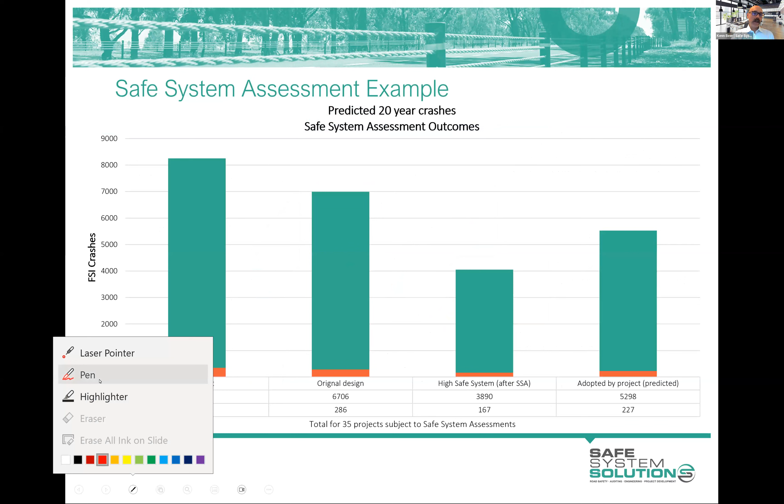Okay, I want to talk to some of the benefits of a safe system assessment. This graph is the output of an independent evaluation of 35 safe system assessments that were undertaken on really big projects. So we're talking town bypasses, new motorway interchanges, really big type projects. Now, this was done using a crash prediction model and technique. Basically, for those who know ANRAM, it was ANRAM plus a little bit more. This was led by Blair Turner, for those who know Blair.

It took all of these safe system assessments, looked at the projects, looked at what they were planning originally, what the safe system assessment said, what they ended up building, and used a prediction over 20 years as to how many crashes would have occurred, how many were saved. So let me talk this through, because this particular graph tells quite a story. This is fatal and serious injuries. Some of you might use KSI, killed and seriously injured, but FSI is what a lot of jurisdictions use. And it starts here with no project.

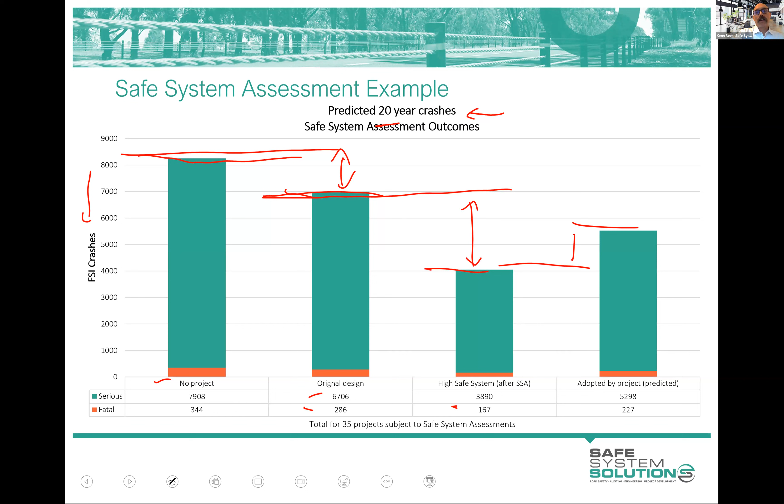the story it tells here of interest for me is that, first of all, we see benefits. We see benefits there from the original design, just what they're producing. It's going to improve safety. That's sort of what more we could do in a theoretical sense. That's an interesting one as to why we go back there. But the difference here, that's the current and immediate value of safe system assessments.

Just by going through the process you're going through, making the recommendations and them altering it within their abilities to do that. So this one for me is quite interesting in the sense that why are we as safe system assessors saying things and they're not adopted? And there's many reasons for that. It can be things around cost, perceived community acceptance, uncertainty around the treatment suggested, maybe just a cultural thing of not wanting to do that sort of stuff. So there's lots of reasons, and I think we can continue to work on that. I think that's just a huge tick, and that's why a lot of jurisdictions are mandating safe system assessments.

But this is another one I find interesting. Why are we still seeing all of those deaths and serious injuries all over these areas over the next 20 years, even though we've done a safe system assessment, even in the best safe system assessment outcomes? And that's what we'd call the residual. And it's something we need to work on. But these are things that we don't really have good answers to.

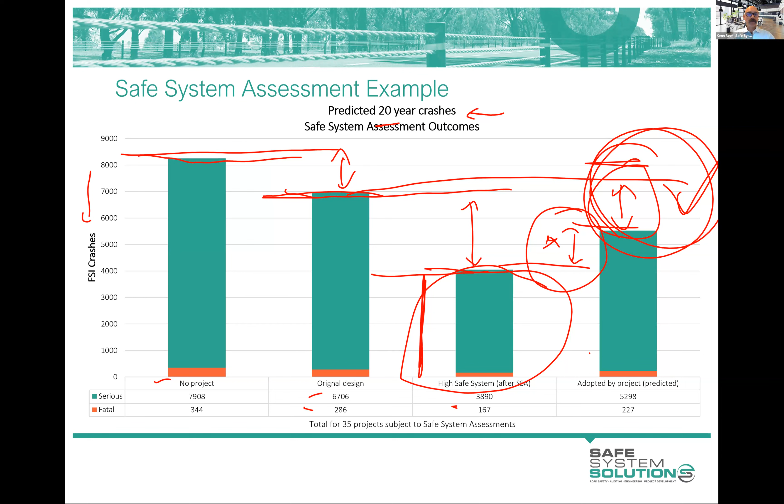And in terms of other benefits, a few dot points here, which you can have in your back pocket if you're trying to talk to people about why they should consider doing a safe system assessment. Really good way of determining how well a project aligns with safe system principles, which sounds obvious, but a lot of the time it's just been an area for debate and people arguing with each other about safe system alignment and not. So it at least provides a methodology.

Great for comparing project design options or choices around intersection form or project alignments and these sort of things from a safe system perspective. And we haven't really had that. Any of you who are road safety auditors, you remember that we say a road safety auditor's job is not to rank your projects from best to worst for safety. They just simply look at the risks of the project that's put in front of them. Whereas a safe system assessment provides that nice way to actually compare. So if you're doing a multi-criteria assessment or something, it feeds in just beautifully in terms of that weighting of different design options.

Information on design changes that will move a project closer to safe system objectives. And it is closer. You saw that just doing a safe system assessment isn't going to get us to zero. There's a whole lot of other stuff, but it's moving us along significantly there. It's a good method for assisting planners, designers, project managers to move the safe system from theory to practice.

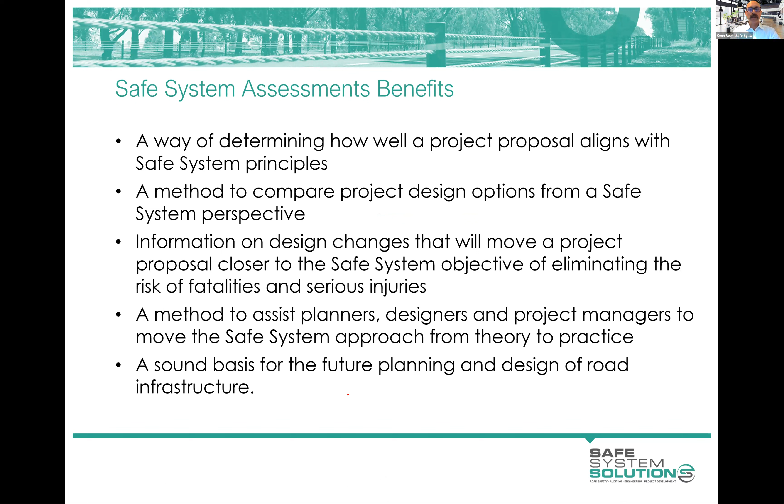Okay, so keep your questions and comments coming in, but I'm going to take you through the general safe system assessment process. So a project, they're planning, they're thinking about doing upgrades to a road or an intersection or a motorway or a massive length of road. And where along the line is a safe system assessment good and where's a road safety audit good? And we always talk about doing safe system assessments early in a project. I think you're getting the feel that a safe system assessment is challenging a lot of the fundamentals of projects, the intersection form, the cross-section, the addition of separated shared path facilities. It's pretty big stuff. And if the business case is approved and the designs are all done and they're into the details, they're not going to change any of that.

So we want to be in there using this methodology to try to influence the form if we need to get better safe system outcomes. Then road safety audits just seem to have a process that sits better with those details. Partly I give examples of, like, maybe a road safety barrier's flare rate or something like that.

Okay, the flare rate of the end, like, in a safe system it is not going to change your scoring. It's not like that; safe system assessments are bigger, meatier things than that. But that's important stuff, and we should, at the details, be looking and investigating into that. And a road safety audit does that sort of stuff really, really well. That methodology just lends itself to that.

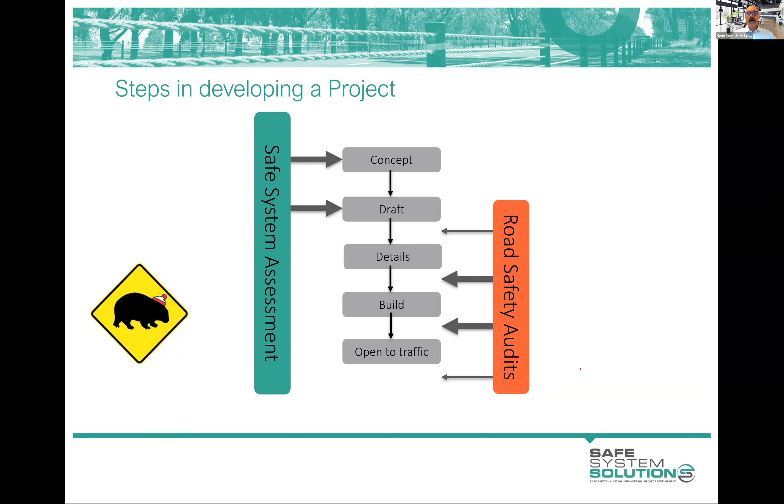Yeah, so there's a little bit of a general diagram you could have a think about. But those differences between the road safety audit and the safe system assessment, as I mentioned, they're coming closer together. They both look at the likelihood of crashes really well. The severity of crashes, road safety audits should look at quite well, but I'd just say that industry practice and some lagging processes and ways that people operate mean that sometimes you're absolutely forced to do that in a safe system assessment, and it's really handy to have that.

I still see this quite a lot, like a new large signalized intersection, and there's a road safety audit undertaken on it. And the issues that come back are talking about sight lines for the signals, back of queue issues, line marking alterations, and these sorts of things. Very important stuff associated with trying to stop people crashing.

There is just nothing in the report associated with what happens when somebody runs the red light, and they're going to do it fast. And so they're not thinking about the severity of crashes, because in their mind they're all about eliminating, or trying to eliminate, the possibility of a crash happening. And that's fantastic. We want to do that. We want to do as much as we possibly can there, but we have to get in that mindset that crashes will still happen. How bad are they going to be?

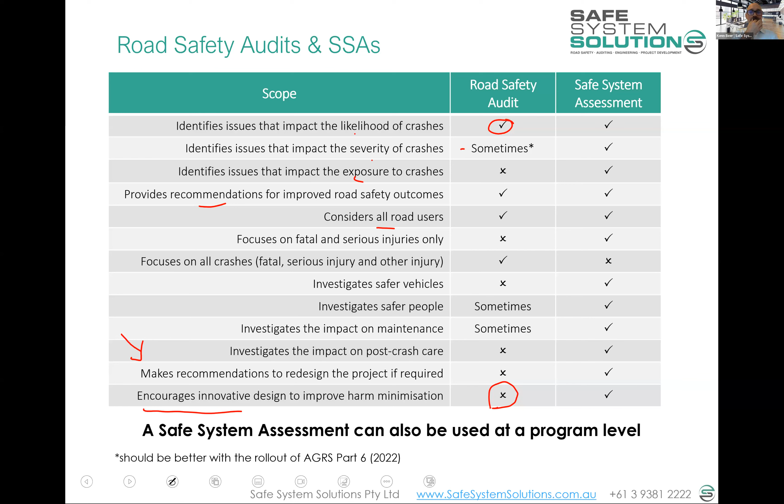So the process we do is that the client or somebody who's commissioning the safe system assessment decides: are they going to do a full-blown safe system assessment, or are they going to do what we call a rapid or light safe system assessment? I will, in a slide or two, show you the difference between those. It's not like one takes two weeks and the other is done in an hour. No, they're fairly similar. The rapid maybe takes about 30% of the effort off, so it's still about 70% of the effort.

Is my screen black? I can see the title. Yeah, no. It's okay. I think everyone's all good. So maybe Anthony, if you could log out and log back in, please. Yep, perfect. Thanks, Ken. All good.

Good, thank you. So I'll talk to you about full and rapid, but then a safe system assessment team's chosen. Now, the only jurisdictions to have any sort of registers of safe system assessors are Victoria and South Australia. Everyone else is just accepting a certificate of successful completion of a safe system assessment course, which you're well on your way to getting. But I'll even show you the Victorian one as well in case you want to jump onto that.

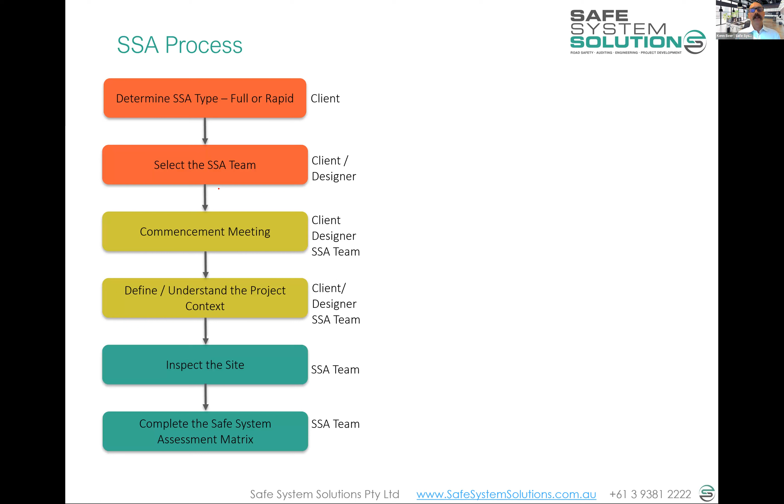And then the assessment team's got all the information that they need, and then they'll go out, they'll look at the site, try and understand the existing conditions, and then fill out the safe system assessment matrix, consider those other elements of the safe system through those qualitative questions that we took you through, come up with some suggestions for changes that would improve alignment with safe system principles, write that up into a safe system assessment report. And we're lucky now we have the templates that we can use, so we're all consistent across industry in what we're producing.

And then that's handed over to the client, and their responsibility then is to look at all these recommendations, the scoring and everything like that, and make decisions on what they can change, what they can implement, what they can adjust in their project. And they do that. They amend the project, the design, to incorporate what they can. Now, if that's not going to happen, then what's the point of us going through all of this big exercise?

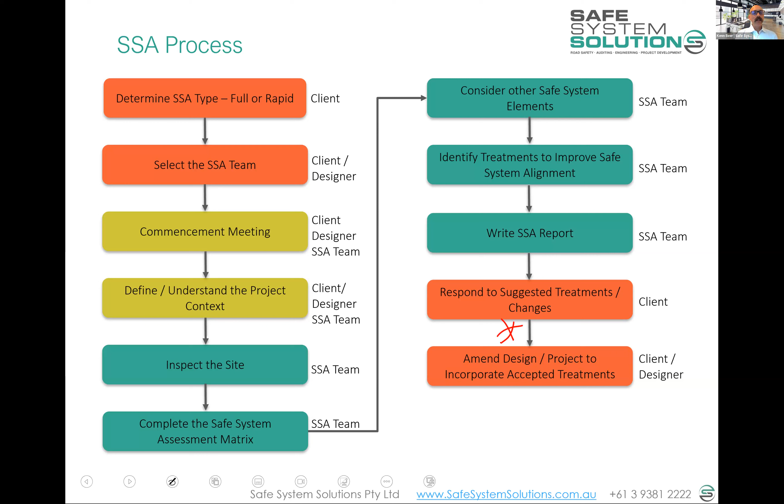Now, sometimes at this point, a project team, they've got the report, they've got all these suggestions. They say, well, we could do these. I wonder how that would change the safe system assessment scoring. And they might give it back to you to rescore. And so then you do an additional matrix on this new, what they've accepted and adopted. And I kind of like that, because it actually gives you this really wonderful sort of justification of your project.

Because if you sort of start with a chart there that says, well, we had a safe system assessment score of 250, 0 being perfect, and 448 being the worst. So start at 250 of the existing conditions, and then we did a design, and that brought it down to 200. But then we did a safe system assessment, and they made recommendations, and we incorporated as many as we could, and that's brought it down to 120 or something like that. Then you're showing, hey, we did the best we could. We got some extra advice, and we really pushed the boundaries, and that's where we've got to.

It's a good story. I mean, yes, you then say, is there absolutely anything else we can do there? But we find ourselves where we're at. But if anybody's asking, are you doing the best you can for safe system alignment? That's your sort of justification there that you have done that.

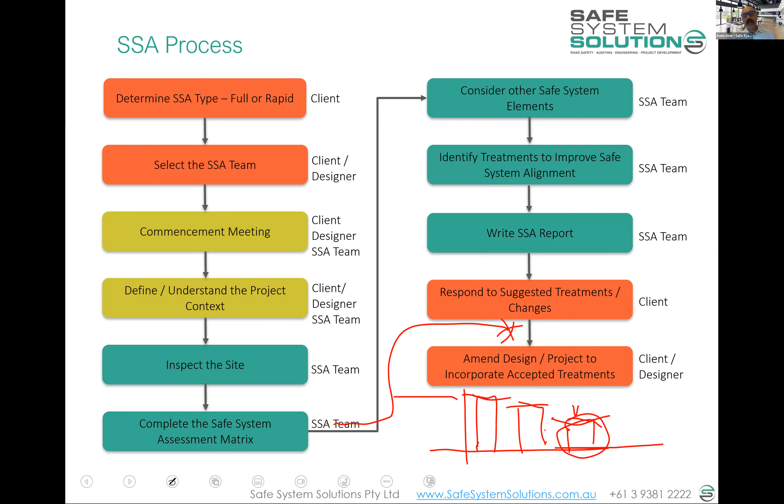So I mentioned Victoria has a register of safe system assessors. It's on the VicRoads website. They're still using the VicRoads website, even though they're Department of Transport and Planning now. Well, they are for this week. No, I don't know anything is happening next week, but there's always change afoot in every road authority.

So the Safe System Engineering page has this information about safe system assessments, and the safe system assessment framework and the templates that you used. But they've got this bit further down that page, which talks about growing the list. And the list is the list of recommended safe system assessors. And it says, okay, if you're interested in that, do an approved safe system assessment course, which you're doing. Okay. Then do an official safe system assessment.

So go to a client, find one, actually go through the full process. The one you're doing is a training exercise. You don't have a real client. You haven't been able to sit down and have that meeting. You don't know the full context of the project. We want you to do a proper one.

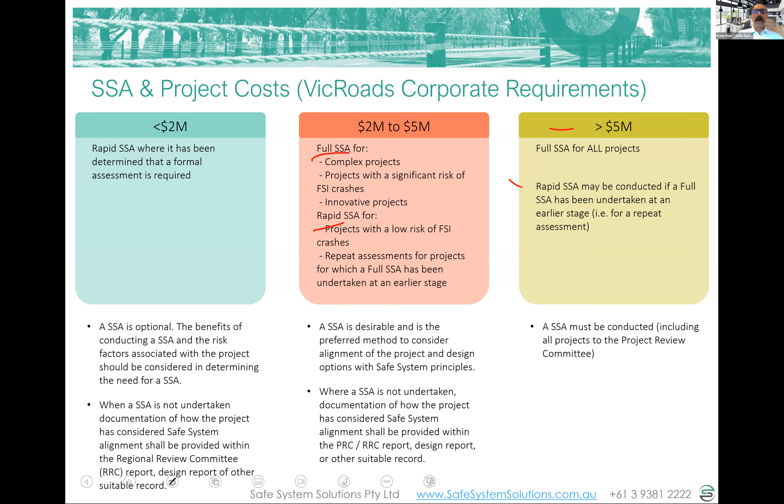And I think that's a bit of overkill, but anyway, I can't get quite clarity on it, but certainly for bigger projects, it's definitely happening, as is in New South Wales as well, and other jurisdictions that are following suit. Okay, the difference between a full and a rapid safe system assessment, or in Queensland, they'll call that a light.

Things in my way. Sorry, I'm not being able to write properly there.

So the following things are in a full safe system assessment. I'll go through the full list and I'll just tell you which ones don't happen in a rapid, which is probably easier. So commencement meeting, if it's required, like for a rapid, sometimes it's just an email exchange of information. A full safe system assessment really is going to have some sort of Teams meeting or sit down around the plans and a chat about all of that.

You need the project background and context, so that might have just been emailed to you in a rapid. The workshop, which is often combined with that commencement meeting, it's optional really in the full, even if everything's sorted in the commencement meeting, but in a rapid, that's not really done. And a site inspection is optional in a rapid. Now, we do encourage it. I think you're going to see the value of site inspections, but you can do a rapid at a desktop level.

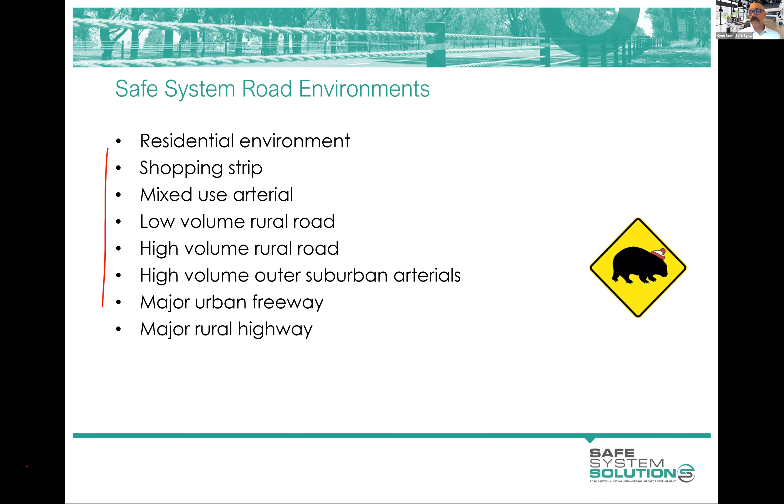Looks like Rick's got his hand up, so let's jump in and have a chat with Rick there, if I can do that. No, I can't. Loretta, you're going to have to do that. No, maybe we've lost Loretta as well. No, I've got, Rick can speak now. Thank you. Oh, maybe Rick doesn't want to. Maybe it was an accidental hand up. That's okay. Rick, if you did want to say something, feel free to have a chat with us at any point. Jump in.

In a second, I'll see if anybody pops anything in. Remember to pop in exposure, likelihood, or severity. So just maybe put an E and an L and an S, whichever after your thing. So we've got, good. Okay, there's one with L's and S's. So local area traffic management to reduce speed. So severity and likelihood. Correct. So Adam can have a prize for that.

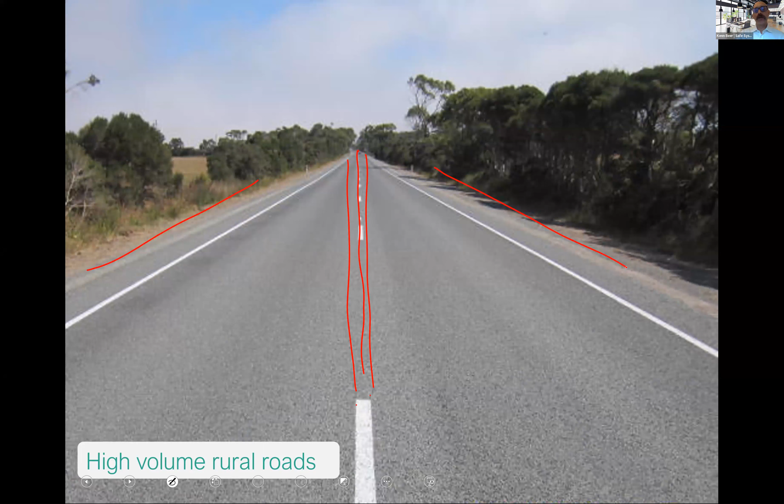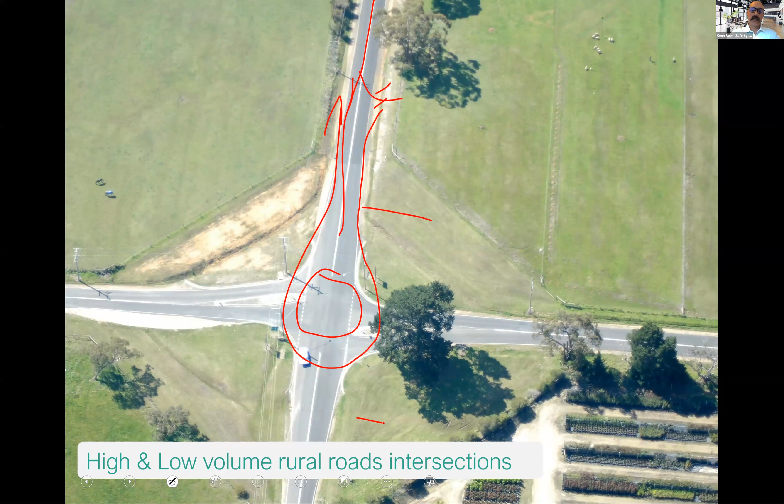And of course, there will still be intersections at these, but your major intersections would have roundabouts, and that complements your central barrier system quite nicely, because if you have those strategically placed, different access points can come out and you turn around to go that way, as opposed to having to have a break in your barrier. Think about the distances you can do that. Or, some of the more minor roads would have side road activated speed limits and reductions in speed at those locations.

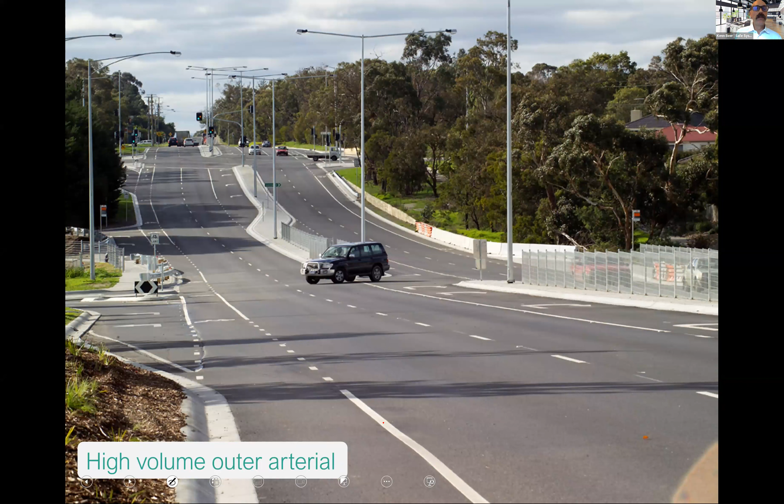Your outer suburban arterials, major traffic roads with low pedestrian activity and the like, we certainly don't want mixing of vulnerable road users, so they should have their own separated facilities. These are probably the environments where we can start to limit pedestrian crossing, and pedestrian fencing starts to become more acceptable, providing pedestrian underpasses, overpasses, and really getting the vulnerable road users out of there from an exposure perspective, and managing conflict points for vehicles, especially around these major conflict points, even though we've got signals to reduce the likelihood, thinking about the severity of any incident in those locations as well.

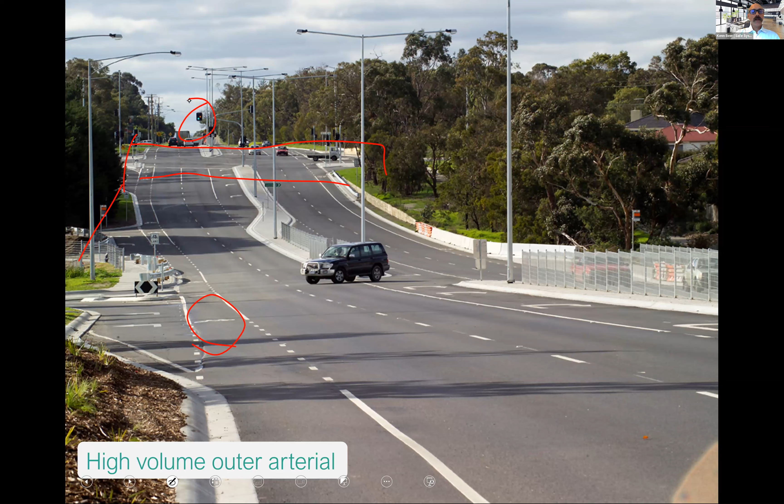Motorways, so freeways and the like, urban freeways, they have pretty high alignment with safe system principles in the sense that they've usually got continuous barrier systems. They don't have the crashability of head-on crashes or even side impact crashes. So we've eliminated a lot of those challenging crash types already. But we do see a fair bit of pedestrian death and serious injury on these, associated with people getting out of cars late at night, often getting out of taxis, and for one reason or another wandering around, broken down vehicles, getting out, and those sort of things.

Managed motorways is a really exceptional way to try to lessen that risk, lessening the likelihood and sometimes the severity of crashes. The managed motorways are where you have your gantry and your lane use management systems, the ability to close down lanes, and you have ramp metering and a whole lot of things. So these areas often perform really well during free flow operations, and really well if they're absolutely congested, because there's not enough speed for anything to cause major damage. The crash types have been eliminated.

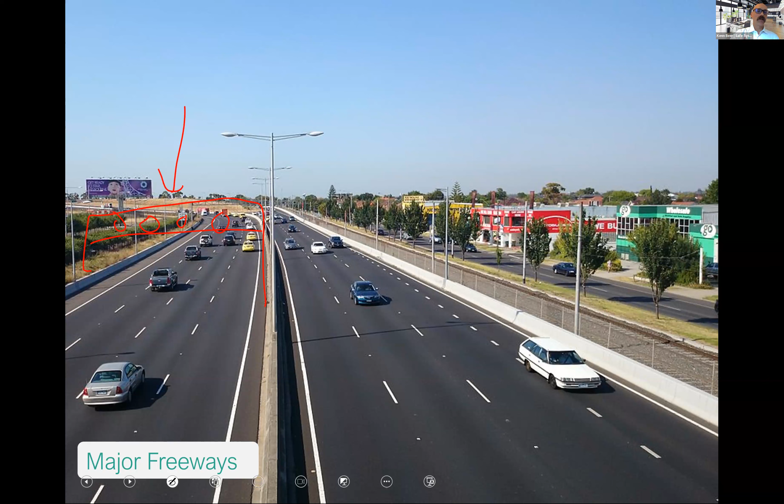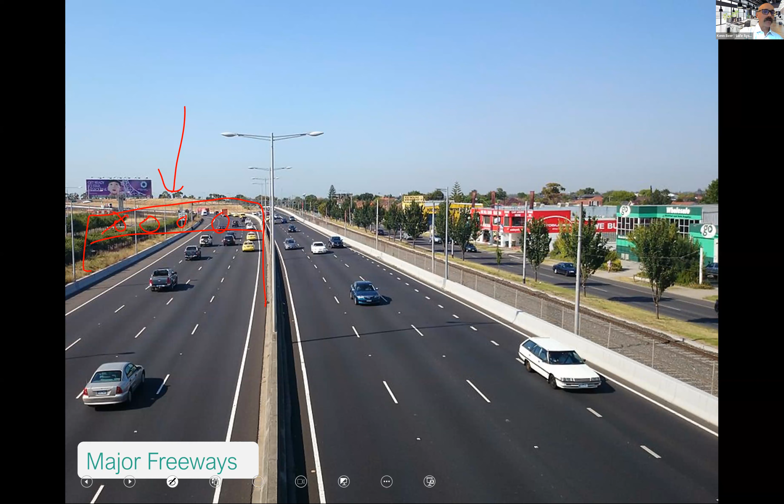As the flow breaks down, we see some problems, and so again, you can manage that by monitoring vehicle volumes and speeds and headways, and then there are lots of algorithms out there that will suggest when speeds are reduced proactively to lessen risk.

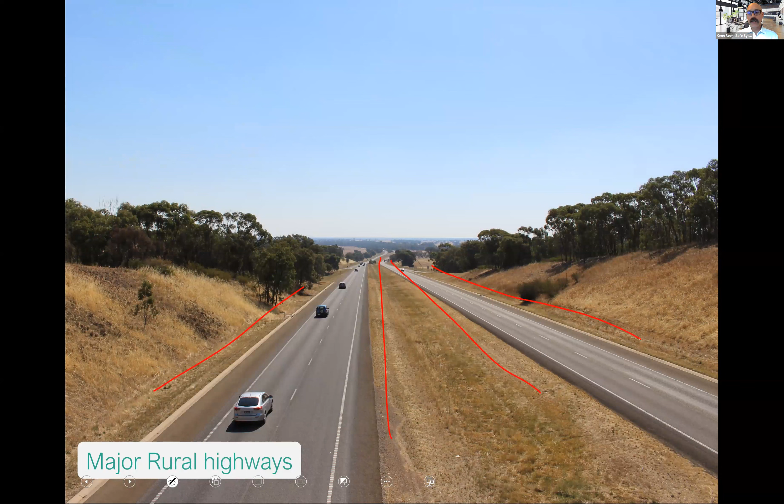And major rural highways, which is the final one, are obviously going to have continuous barrier systems the whole way in order to maintain that high speed. And when we get to intersections, they'll either be grade separated roundabouts, or the only other real option you have is like a left in, left out acceleration. Drawing something like a median in the middle here.

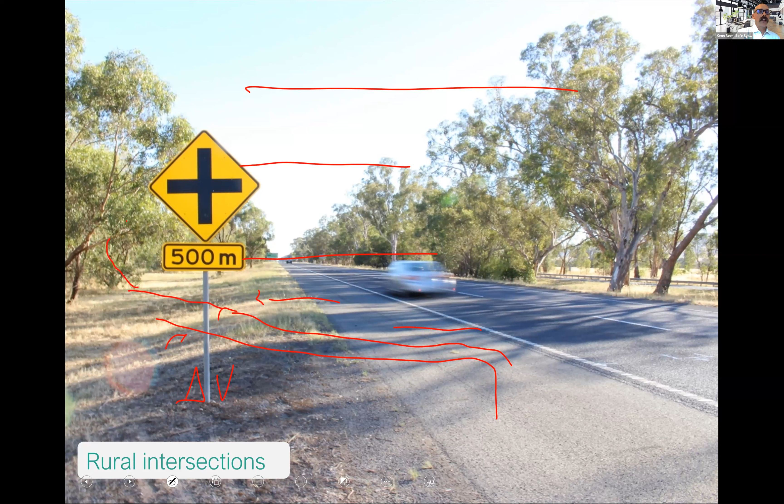And so vehicles could accelerate, so that any crash that happens there, the delta V is low. You've got to think about the roadside as well at these locations. Enough time to accelerate, change lanes, and then some sort of acceleration lane back in the other way, right up to enough speed, again, that the delta Vs are low, and thinking about managing that, and then they continue on that way. So you've actually managed your energy in both scenarios.

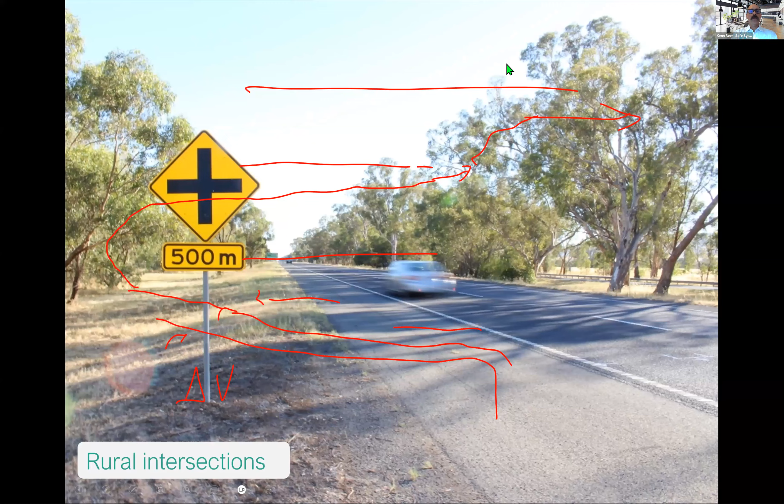Thank you. Got a couple of things. So firstly, I'll just go over the recent one from Adam. So if we are targeting to keep high volume routes at high speeds, will this result in potential congestion and maintenance issues if low volume roads are not able to cater for the overflow? BCRs often have a flaw that there needs to be significant use to justify road projects. But if we intentionally guide users away from certain roads because it's too hard to make them safe, then those roads will likely deteriorate and become less safe.

But yeah, the reality is there would have to be further investment in the higher volume roads to cater for the capacity of vehicles that might shift off a lower volume, lower infrastructure safety characteristics road, if we're going to pull the speed down, or it's just traveled at a lower speed. I think it's a complex balance, but at a very simplistic theoretical level, major roads, regional roads I'm talking about, will be kept at high speed, and the infrastructure money will go into those.